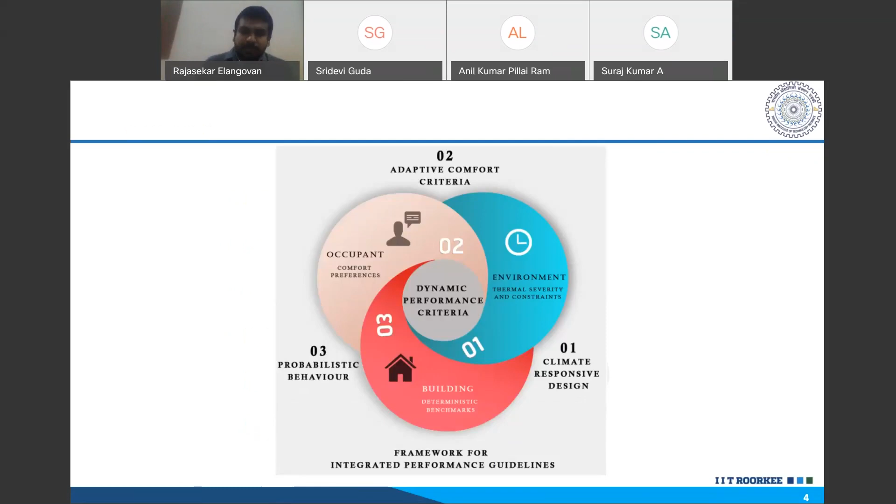So before we move, this is a slide which I take up every time I start a new topic. This is how I see the building and the performance of a building. There are three major aspects which drive the energy use in a building.

Number one, it is the environment, the thermal severity. Say I build something in Hyderabad versus something in Delhi, Roorkee, Chennai, or Bangalore. So it is the thermal environment that is driving some of our primary energy needs in the building. It is also the occupant, so it is me living in Bangalore, me living in Delhi, or me living in Roorkee, making the building use more or less energy. So first is the environment, which is putting some thermal stress on the building.

Second, it is the occupant who is using these gadgets or appliances, eating the energy. And third, the building itself. When I say building itself, it is the brick and mortar, the envelope, the fenestration, glazing, everything put together, what makes the building by itself, just by itself.

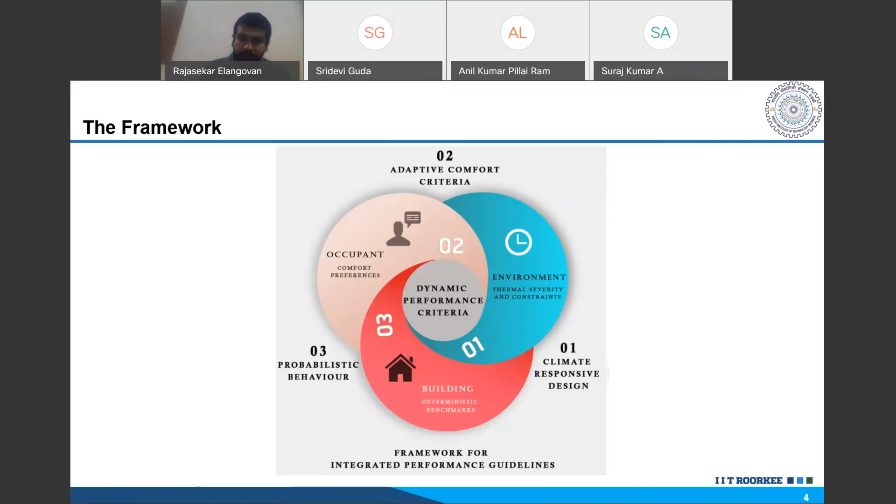So I'll just quickly move on to energy in buildings. Commonly, we refer to energy in buildings as the cooling energy, which is the climate loading we call it.

What is the load which is imposed on the building by outdoor environment? It is a basic thing which HVAC engineers do in cooling load calculation. Plus, there is an internal loading. That is, a building may have 10 people, it may have 100 people, or maybe just one person. Maybe it has 100 computers, maybe it just has one piece of equipment. So this together gives you the cooling energy, which is of course a major energy guzzler in the buildings.

Any building, it could be office, it could be a residential building today, a simple middle income group residence. Cooling energy demand is something which is a major share. Second comes the lighting energy. Apparently, in the last 3 to 4 years, the lighting energy demand has gradually come down for two reasons. Number one, we have started shifting towards more efficient lighting systems.

And number two, the time of usage, duration of usage, plus there are some code standards which have come into picture, which have started driving natural lighting to be better utilized. So probably for these two reasons, the lighting energy demand has slightly percolated down. Then there are plug loads, which is like any gadget that we use. In an office, it could be computers, photocopy machines. At home, it could be your oven, fridge, washing machine, etc.

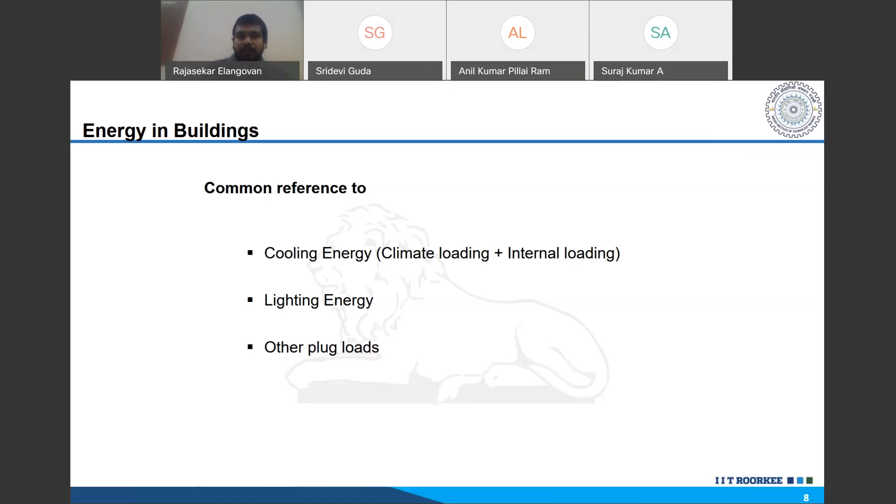If you look at like you have your appliance rating, Bureau of Energy Efficiency also has come up with a schematic. I wouldn't say it is a perfected rating, but still it has come up with a ballpark rating for buildings also. Primarily for residential buildings; of course, there is also a rating, EPA rating for office buildings, commercial buildings, but I would primarily be talking about residential buildings. That is the context I am going to cover more.

If you look at, there is something called EPI, that is Energy Performance Index. That is nothing but how many units of electricity you use per square meter in a year. Based on that, and depending on which location, which climate you are located in, the numbers or the band of numbers might fetch you a single star, 2 star, all the way to 5 star. And it also depends on whether your building is less than 50% air conditioned, like our residences, or more than 50% air conditioned.

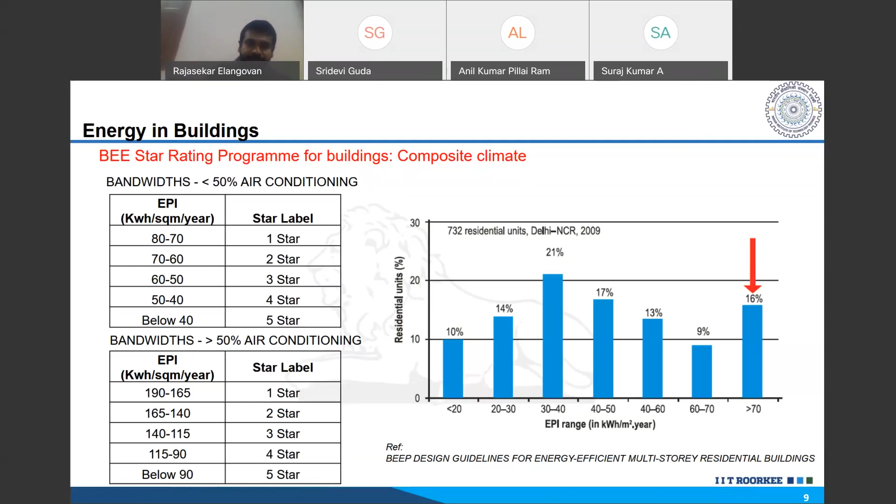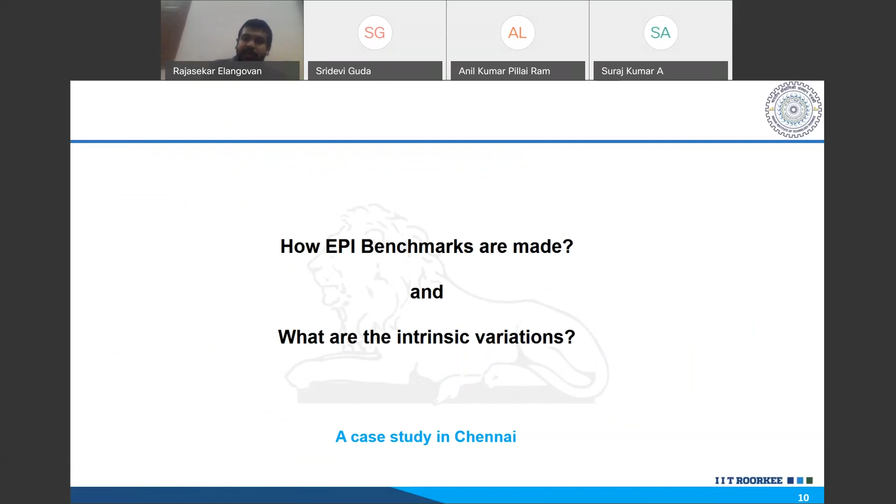Now, before we move on to the material side of it, let us just look at how these EPI benchmarks are made and what are the variations. I will come back to this point, like why I'm talking more about EPI and EPI benchmarks. This is a simple residential tower. It was a case study that we did in Chennai city, somewhere in the outskirts of Chennai. There are about 600 plus houses in this development. It is a small gated community, about 15 storied.

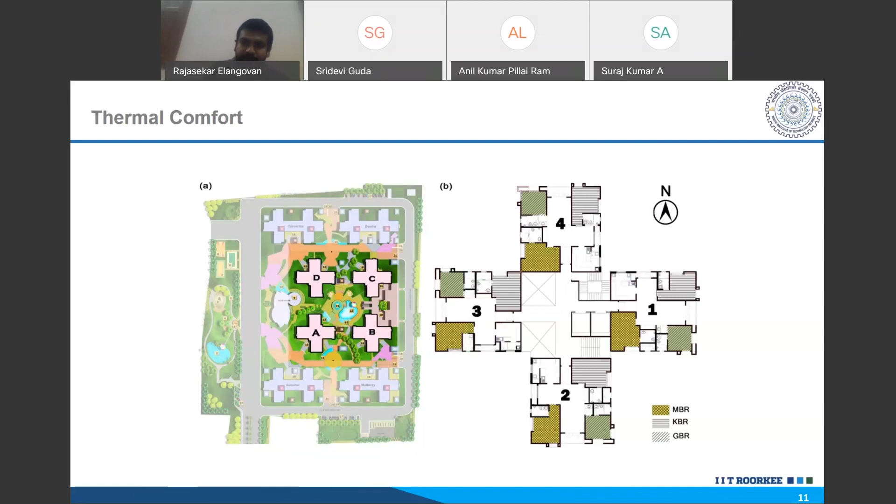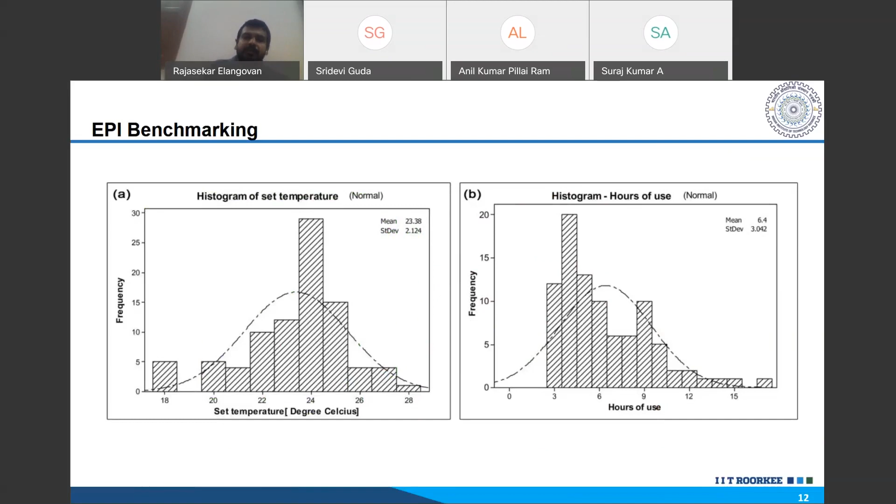There are around 600 middle income and higher middle income units, typically 3 bedroom luxury units. So we did a slightly systematic assessment of their set point temperatures. We studied their hours of usage, their appliances. It is like a pre-energy audit, not a complete energy audit. But then we started looking at systematically what is their electrical energy consumption. We took about 5 years of data, what they have been consuming in the past 5 years.

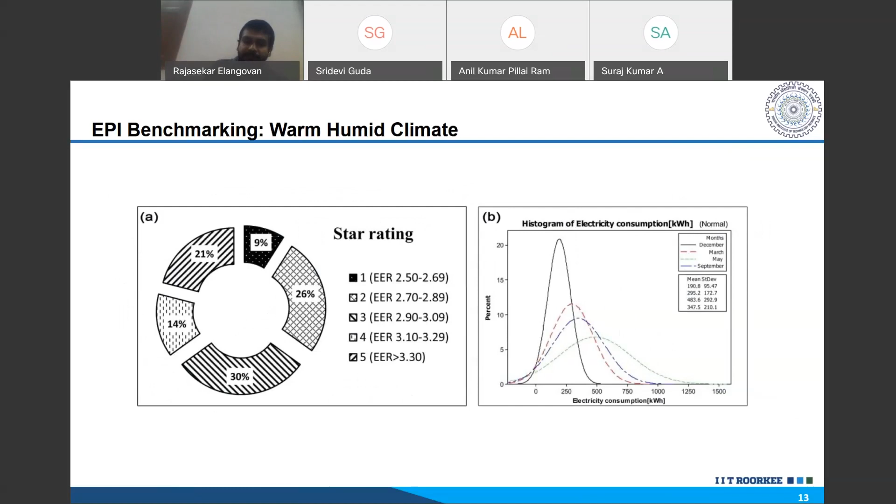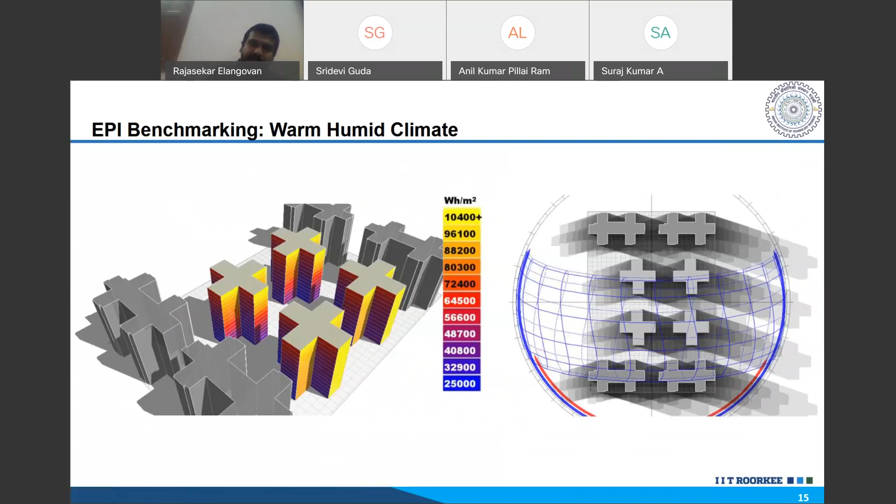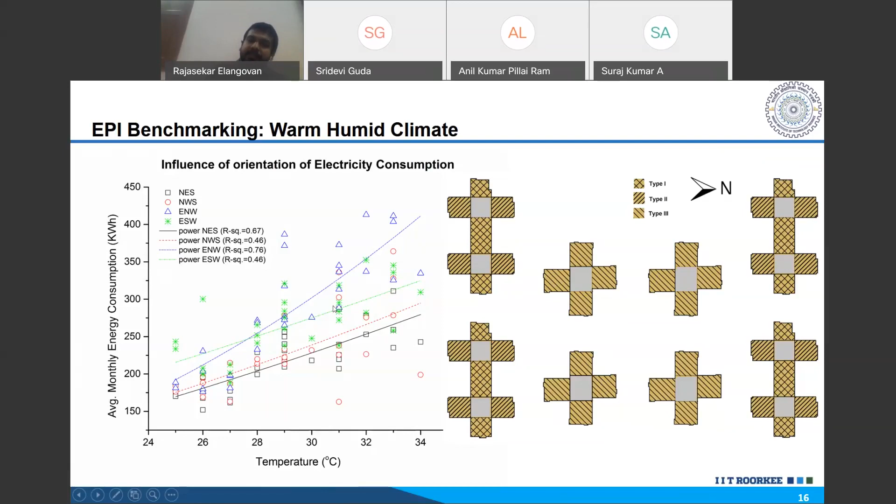It is that simple. But if you look a little more into the details, there is a different solar exposure for each of these buildings. What you are seeing is a small block model. Each orientation has a different type of solar exposure all through the year. I'm not going into the details of it again. When I say NES, it means north, east, and south exposed. This is north, west, and south exposed. Each house is exposed to 3 different orientations. Now, depending on the orientation, there is again a strong influence.

Now I'll stop it here. I will come back to this in about 5 minutes. Let us look at what the total energy in a building is. It is not just the operational energy, that is cooling, lighting, and appliance energy. It is not just the operational energy alone.

We also have embodied energy, that is the energy which is already embedded into the material before you take possession of your building. It is an aggregated energy of what it takes to make a brick, what it takes to make a precast concrete wall, what it takes to cast in situ a shear wall system, what it takes to make an RCC column, everything, starting from your pavements to your handrail, glass, everything. So if you meticulously total everything, you get the total embodied energy.

And this embodied energy is already built in, for which the owner is not liable. It's already there, by virtue of your material specification and your construction technology. This energy is already built into your building system. This is what Mr. Anil was referring to about whether concrete is sustainable, whether it has low or high embodied energy, and how to reduce it. We will just go back to that point very specifically.

Of course, there are different ways of assessing embodied energy. Again, I'm not going into the details of what these methods are. In simple terms, we mostly refer to a method called cradle to grave. Cradle is where the material is born, that is where you excavate and pick the raw materials. And grave is where you bury it, where you dump it. Construction demolition waste, if it is dumped, becomes grave. But if you are trying to recycle it, putting it back into the cycle, then it becomes cradle to cradle.

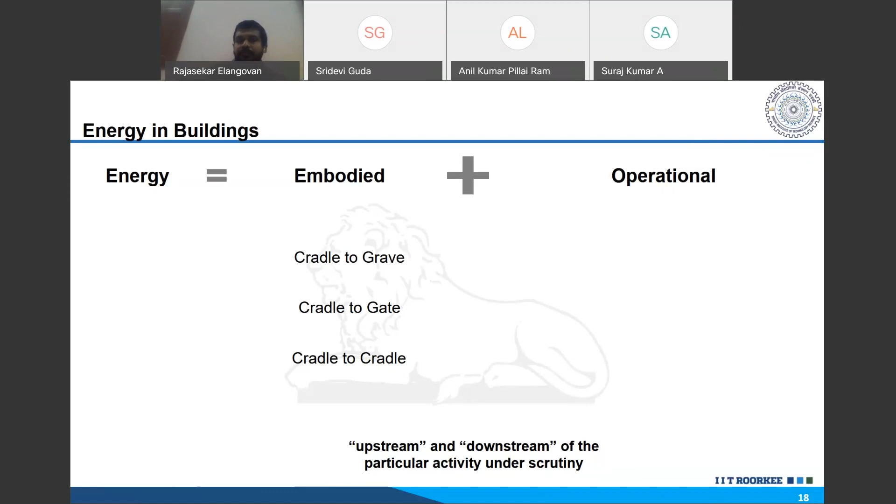But in simpler calculations, we use cradle to gate. That is, it is born at some place and it is reaching me. I am purchasing the material, so it is delivered to my gate. So all that energy in transportation, in making, in excavating, stacking it up, storing, everything put together adds up to cradle to gate. So this is a common approach which you will find in any research or any documents that you go through.

Life cycle assessment is very useful in the sense that it tries to capture the holistic picture of the material's actual energy consumption. Because if I am saying the material is a very good insulator, actually what I mean is when I use that insulating material in my wall system or in my building envelope, I am reducing the operational energy. But maybe the making process of the material itself could have been very exhaustive and it would have eaten up a lot of energy there. So all insulating materials or energy efficient wall systems may not have good or favorable embodied energy. Maybe already there is a lot of embodied energy built in.

The common example, as I always take in any discussion or debate, is that the sustainability of a material by itself doesn't mean anything in today's market. You give the most sustainable material to a multi-storied building and the guy has 3 air conditioners and he runs them every day, then the concept of sustainability is totally gone. Whereas if you actually deliver a moderate material to an energy conscious user, then the overall energy that the material and the building take over their lifespan makes a lot of difference.

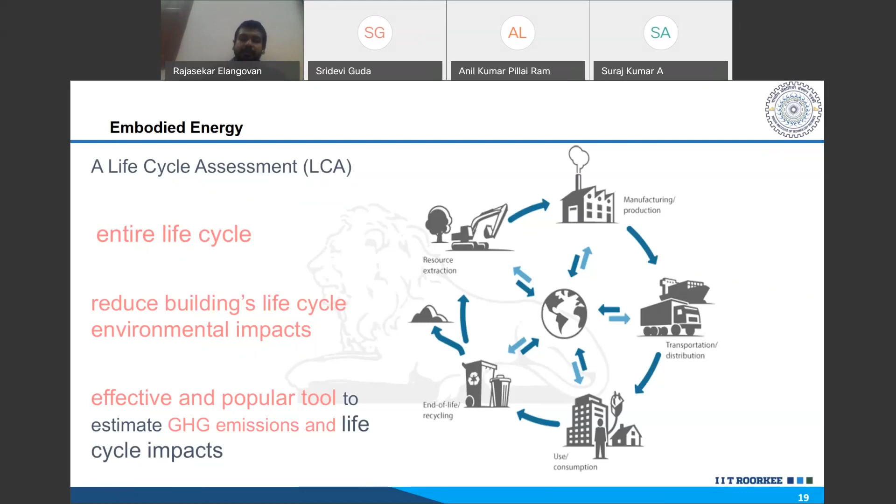Now, there is something very interesting. I am talking about, for example, a brick or a brick and mortar or any masonry system, which is an infill material in an RC frame structure. Frame structure is most common in mid and low rise residential buildings in India. If you look at it, you simply have your RCC beams and columns, and you have some infill material. You can have brick, fly ash brick, aerated concrete, anything, but it is a brick or masonry system with RC frame structure. Now, there is a simple difference. This is what I was talking about when I started the presentation. There is a way in which the embodied energy is segregated in the material.

What happens in the process of brick making? I'm not doing any design, I'm not doing any big research. I'm excavating clay, preparing it, molding it, maybe drying it for a while, then burning it, either in a factory or in a kiln. Then I'm stacking it, transporting it, it comes to the site. But interestingly, when it comes to concrete, concrete structures are taking two major ways of application. Number one, we are using a shear wall system, that is cast in situ concrete, where you have your reinforcements in place and then the concrete is just pumped into the walls, so you get your shear wall system. Number two, another emerging, or I should say already emerged, method is a precast concrete system. You make everything in the factory, you get concrete slabs, even staircases, sometimes smaller rooms like your bathroom units, which are just brought in a truck and assembled. So typically you are assembling or fabricating on the site.

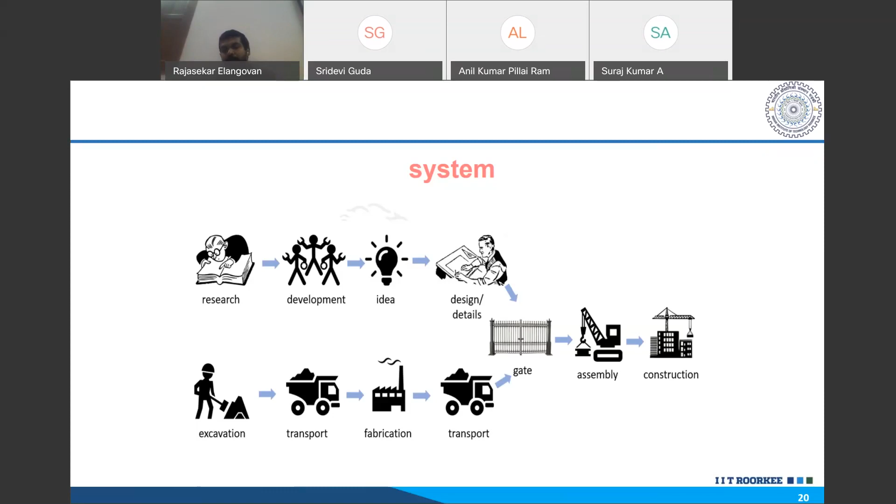There is an engineering component. So somebody or a team is sitting in an industry doing research. So there is some amount of energy consumed there. Then there is a development of that idea. Then design detailing happens. Then there is a fabrication part in the industry that is taking in a share of its energy. Then it is transported and it is assembled. So what we did actually was, we went into mapping the whole energy consumption links, I would say, or sub-processes of new construction system.

Interestingly, we found, or we could establish, that it is not a single directional or a single dimension approach. It should have three approaches. That is, one is the material quantity, number two is the manpower, and three is the time. It should be a three-dimensional assessment which will give the actual picture of the embodied energy or the carbon footprint or the carbon emission associated with these materials.

When I say three dimension, why I am insisting here is most of our embodied energy assessment today is single dimension. If you ask an expert to compute what is the embodied energy, he or she is going to compute the material quantity. Either he will take the bill of quantity or he will compute the quantity estimation, and based on that there is an embodied energy value. For example, if it is brick, it is X. If it is concrete, it is Y. And if it is a fly ash mixed concrete, or some other industry waste or slag based concrete, then there is a Z value.

Now these are aggregated, but what we have established through our field data is there is an offsite process which cannot be ignored. For example, there is a design process, there is a fabrication process. When I say design, there is resource which is material and manpower, fuel as well as infrastructure. When there is a fabrication, there is a process, that is techniques and logistics, plus you have technology, then you have certain specific equipment which could be manufacturing equipment or some equipment which is used for lifting, placing, assembling. Then there is an on-site process. In the on-site process, again it is material, manpower, fuel plus techniques, logistics and equipment.

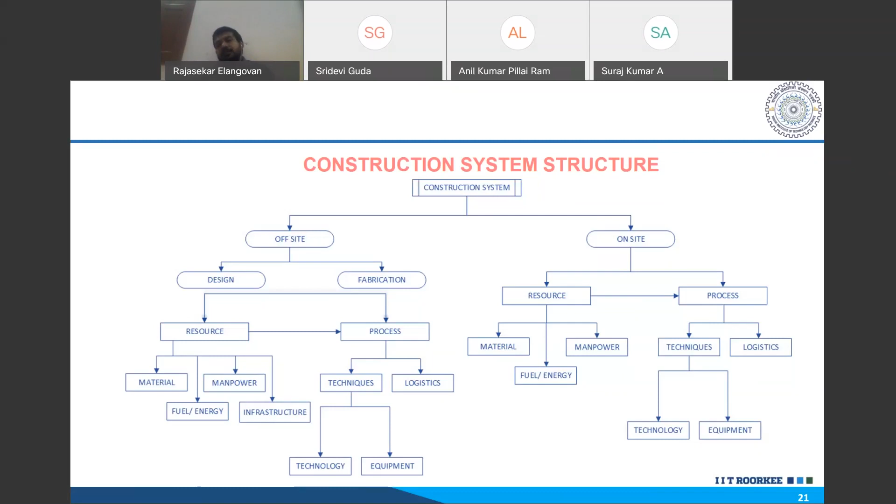So now what is so interesting here is, irrespective of what material I'm going to use in my superstructure, what type of further materials I'm going to use for my paving, for my plastering, finishing, etc., when I'm going for a high-rise building, already the footing or what is under the ground, this building had two basements, two car parks. So if you actually look at below ground, you cannot negotiate with this because there is a live load, there is a dead load, and this much is the type of footing for the soil which is to be designed. It is to be done.

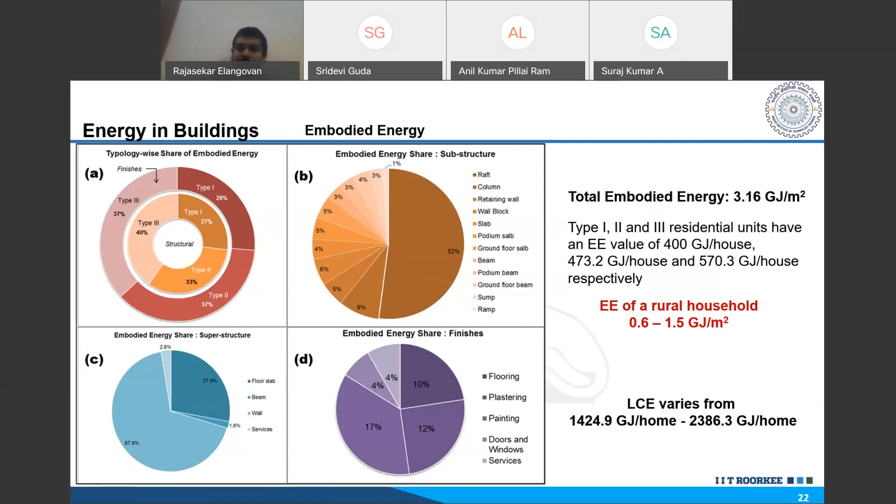Let me see the feedback. Is there some issue with the audio or something? No, it's okay, we are able to hear you. Okay, we can hear you loud and clear. Please go ahead, sir. Yeah, thank you. Oh my goodness, I'm so sorry, I pressed the wrong share button. The screen has gone, no? I was trying to - okay, now it's coming. I'm sorry for that. No, it's okay.

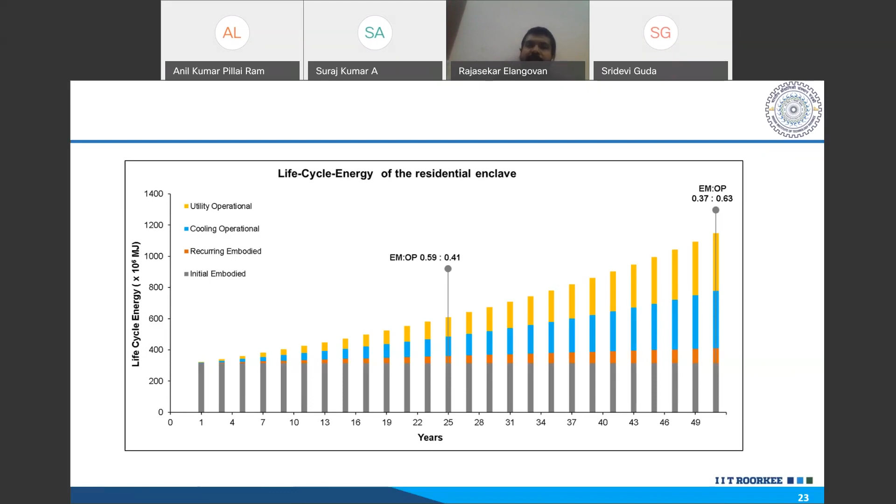I'll show you a small case study that we did using a spatial tool, where we combined a geospatial system plus building information modeling, and we tried to map the life cycle energy of buildings. We took our own campus.

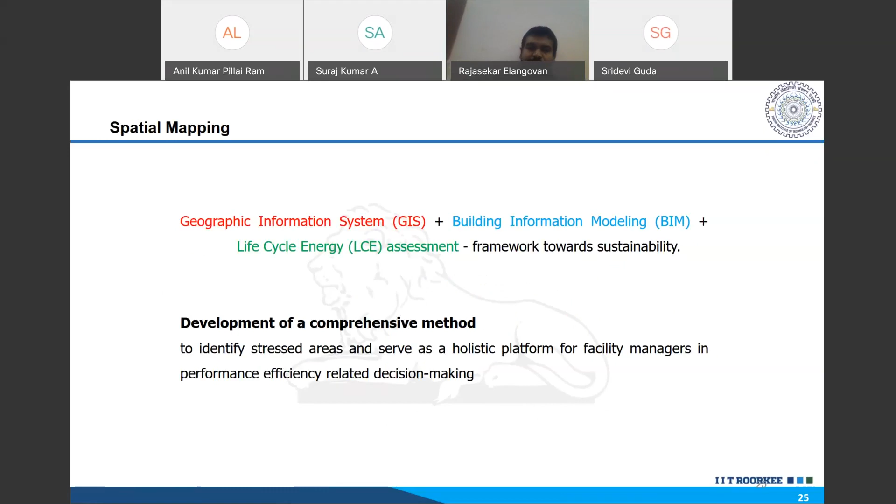This is IIT Roorkee campus. We took a part of the campus to ensure we had variety of buildings coming in, around 40 acres where we had apartments, institutional buildings, a hospital block, hostels, departments, and a guest house. So we took a stretch of around 40 acres with variety of buildings because of their spatial type, material used, and operational character.

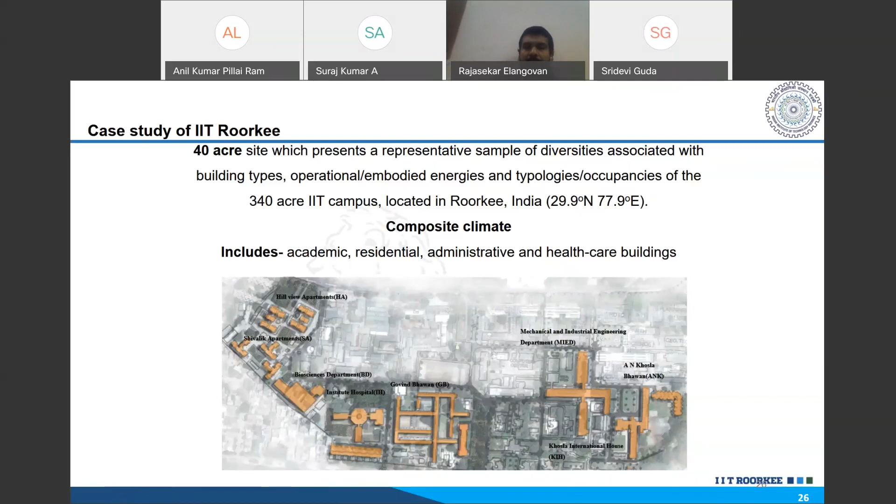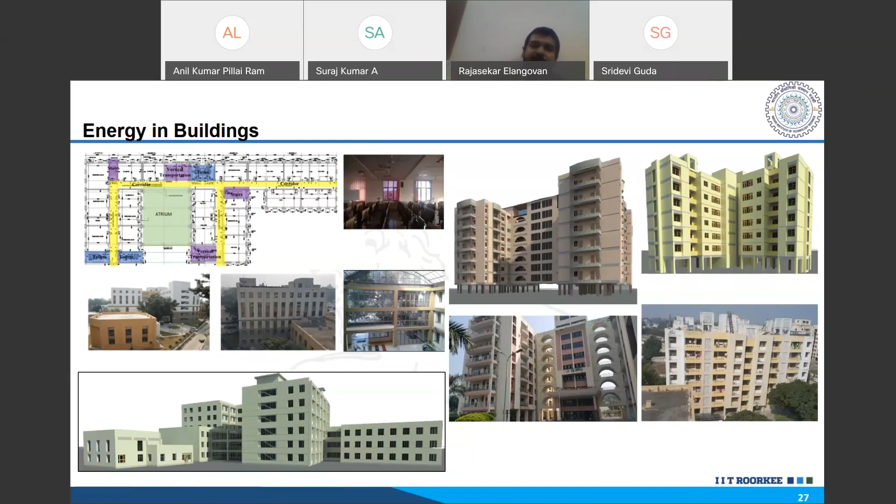These are the buildings for your view. We made a building information model. Some buildings are very old - around 45 to 50 years old. There are buildings which are 2 to 3 years old, some new academic blocks, a new hostel building. There are some mid-age buildings which are 10 to 12 years old.

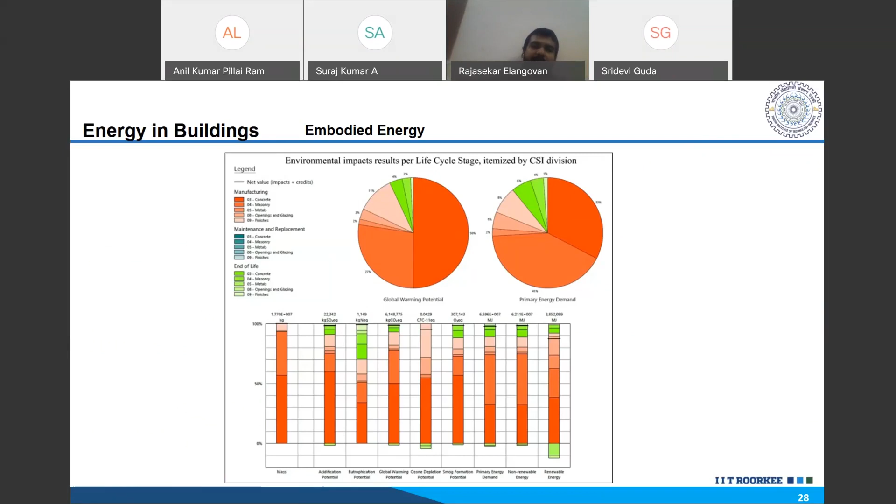So first we did a building information model where we took the material quantities, we took the estimates. Then by default procedure, we computed the embodied energy of this material, this building. Then we took their monthly energy bills like we did in the previous case.

So in summers we have the cooling equipment taking the energy, in winter we have heating equipment taking the energy. What I wish to point out here - the same building, same plan form, same spatial configuration, same material - if I am building in Chennai or Hyderabad versus making the same building in a midland area like Delhi or Roorkee, the energy consumption, especially the operational energy consumption, is going to be much higher. So the overall sustainability dimension is also location dependent.

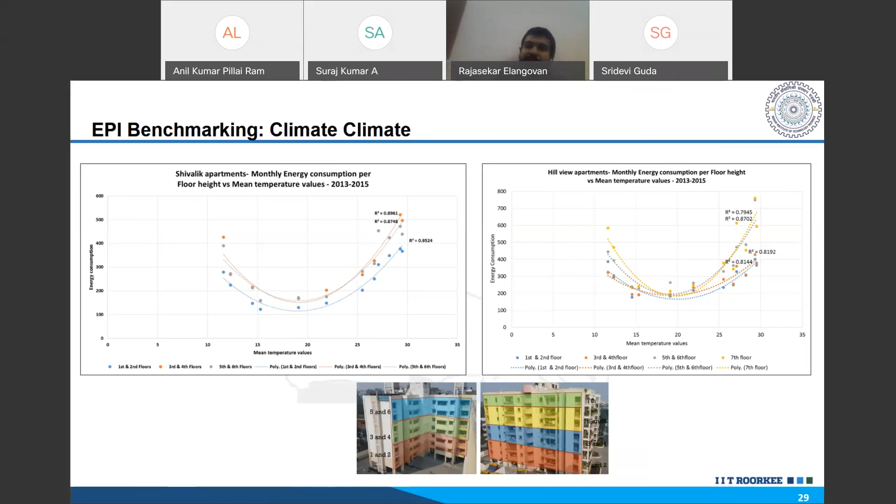Now quickly moving on, like I explained earlier, we did compute the embodied energy, we took the operational energy, then we computed a 50-year lifespan life cycle energy of buildings, and we converted it to tons of CO2 equivalent carbon dioxide, that is CO2 carbon footprint equivalent. Equivalent means we can add up the small other components from other gases, taken as equivalent of CO2. So here we are expressing it as carbon footprint, in tons of CO2 equivalent.

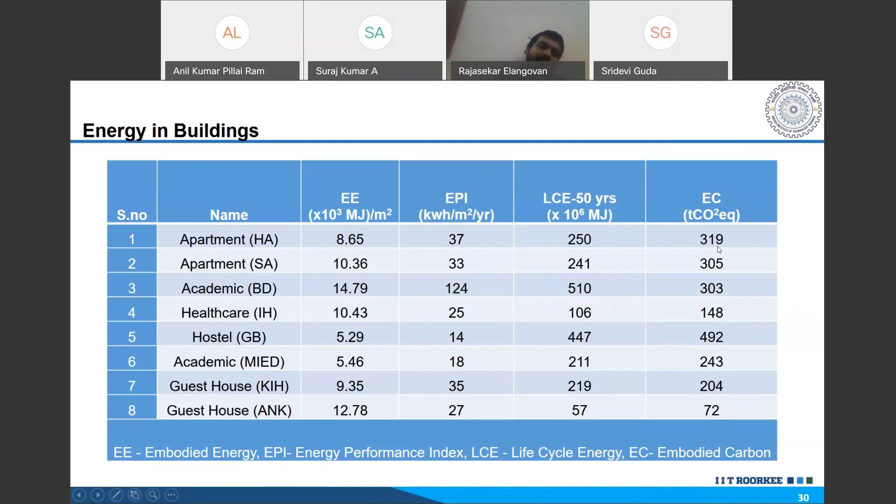So starting from apartments to healthcare buildings, the CO2 emissions - for example, there is a guest house which is consuming pretty less because some of the rooms are air conditioned, some are not, or predominantly it is not air conditioned, versus we have some academic blocks plus a hostel building which are consuming a pretty high amount of energy. There is an embodied and operational share, I will go into the details. But actually what we started looking at is...

What has been the development of this building, because the campus didn't come through in a single day. Ours is a campus which was started in the British era. It has lived for around close to 180 years now. It started as a small, single building in that 340 acres, versus we have almost occupied the whole 340 acres now in 2020. So what we did was we went around 40 to 50 years back.

That means we started removing building by building, and then we started checking how much was the carbon emission 10 years back, how much was the carbon emission 20 years back, how much was it 50 years back.

Plus we did a small but very interesting thing here. If you see the topmost layer of these slices that I have placed, it reads carbon sequestration of landscape elements. This was a very meticulous exercise that my student did. He went around this 340 acres of land, counted tree by tree, noted the species, counted the life of the tree, and calculated what is the age of the tree.

Depending on the age and species, we can compute how much carbon a tree can sequestrate, that is, how much carbon it can eat during a particular time. We call it carbon sequestration potential. Some of our native species have better carbon sequestration potential. Classic examples are banyan tree, neem tree. These have better carbon sequestration potential versus some of the smaller, quick, fast growing trees that we plant today, which do not eat that much carbon.

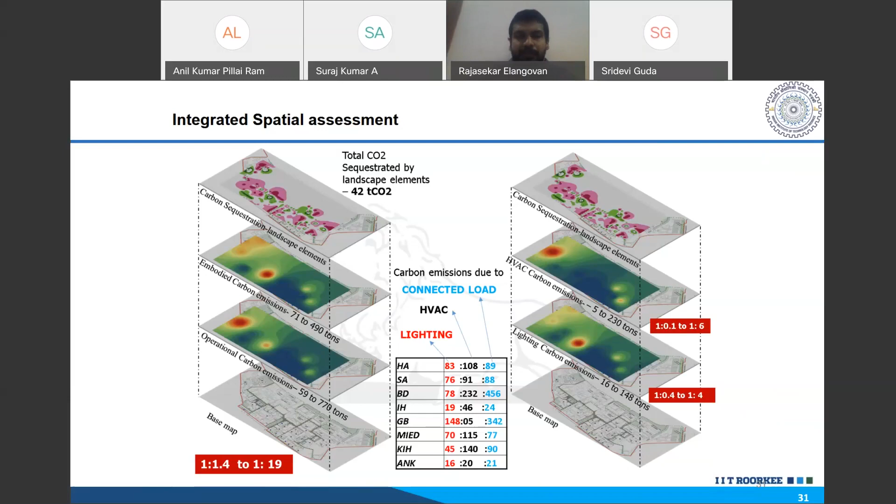Last but not least, I will go into this for about 5 minutes. This is becoming very essential because we are missing some critical links in the way we look at the performance criteria for our building envelope. If you look at some of our older settlements and houses, these buildings had nice roof forms, massive walls, maybe 2 foot or 3 foot thick wall systems, and they have been very comfortable and convenient without air conditioning.

Of course, with today's demand supply gap, we cannot go back to building such luxurious villas for ourselves. It is the compulsion of the day, the technology, the time, the demand which is forcing us into innovation and new methods. But how do we get back to the comfort in which we were living? Maybe not the same building material, but a new material with similar type of performance.

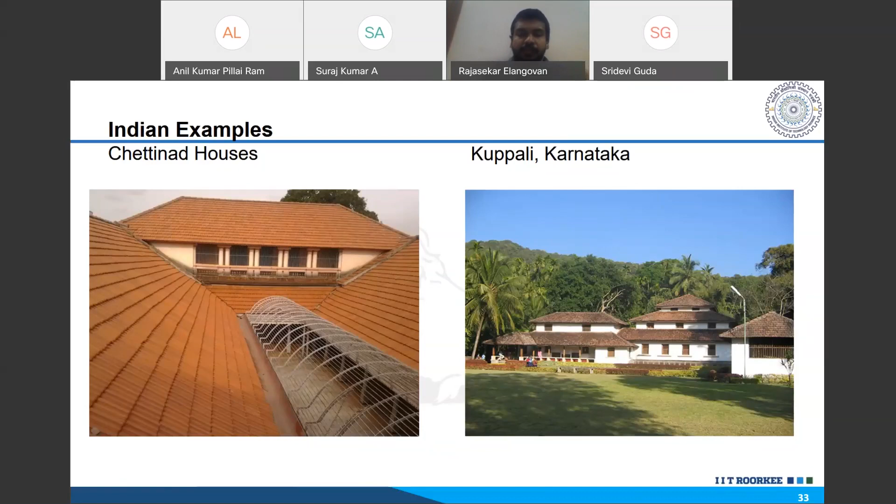Now, the most commonly used indicator for material performance is the U value, that is thermal transmittance, which indicates how much heat is conducted through a wall or material when there is a unit temperature difference per square meter.

So it is the amount of heat transferred from one side to the other side through conduction. But actually we are missing out on some of our existing or typically being used performance criteria. U value, for example, is an indicator of resistive insulation.

And this is the single most dominantly used indicator in most of the European countries and the US. They will be talking about something called R value, that is resistance value. We are talking about conductance and transmittance value, which is the conductive heat gain. So we are talking about how much the material can resist the heat. It's a resistive insulation. So the lower the U value, the higher the resistive potential.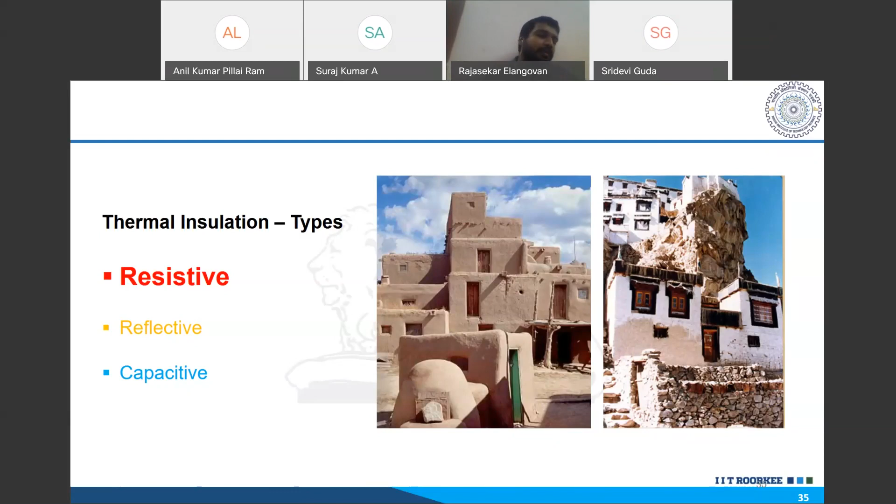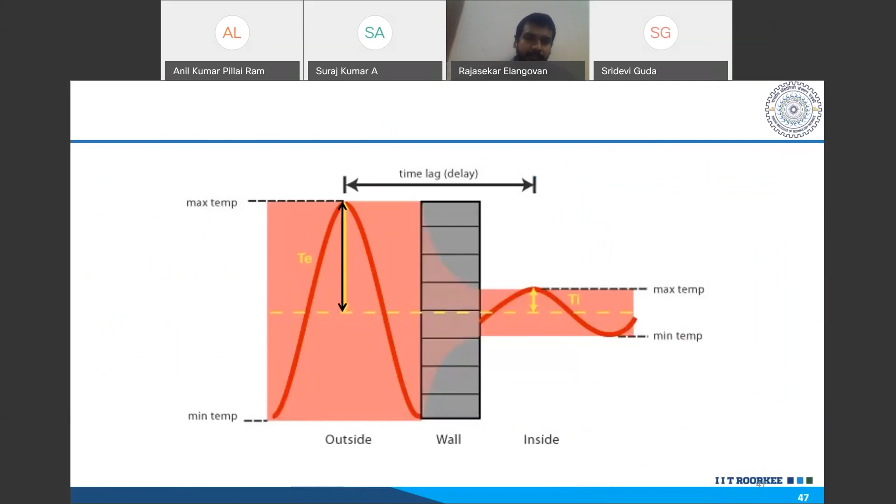I'm skipping some of them. I'm just jumping into the later part of it.

Yeah. With our own experience, with some of the consulting as well as this industry support that we have been extending, we have been successful in creating a 150 structurally insulated precast concrete system. This concrete system has like 10 to 12 insulation, which is sandwiched between the two layers of reinforcement which is present.

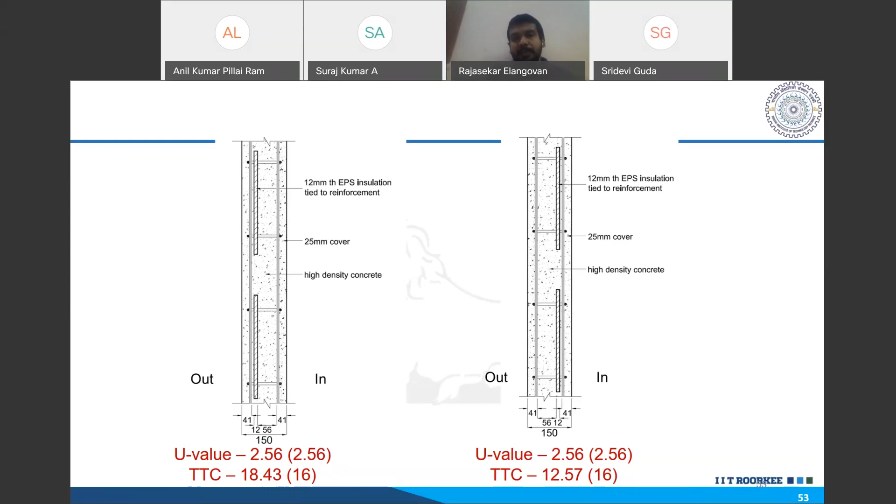Now this is actually giving you a nearly equivalent performance of a brick wall, that is, it is meeting the U value, plus more than that, it is also meeting the thermal capacity requirement, which we express in terms of thermal time constant. It is more or less equaling the thermal time constant which is prescribed in our building codes, at least the National Building Code. National Building Code has, apart from U value, thermal time constant, thermal damping, thermal performance index. These are some of the criteria which are set forth in our National Building Code.

So with 140, 150 concrete slab, I'm glad to share that we have gone in for fire rating, fire testing for this; 3.5 hours of fire rating has been tested for this material. Durability has been tested, spalling potential has been tested, constructability has been tested. We have done it in full scale. There are a couple of buildings, residential towers in Delhi, where we have employed this specific technology, and it is standing its time, for now about 5-6 years it has performed.

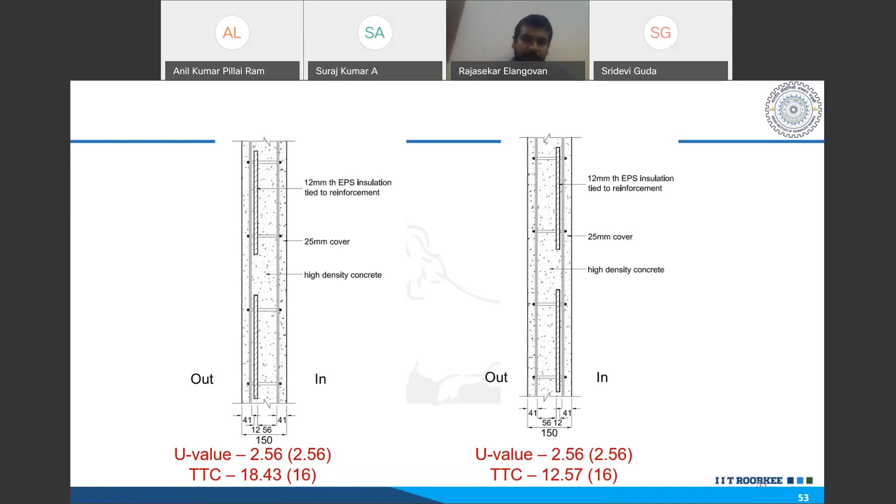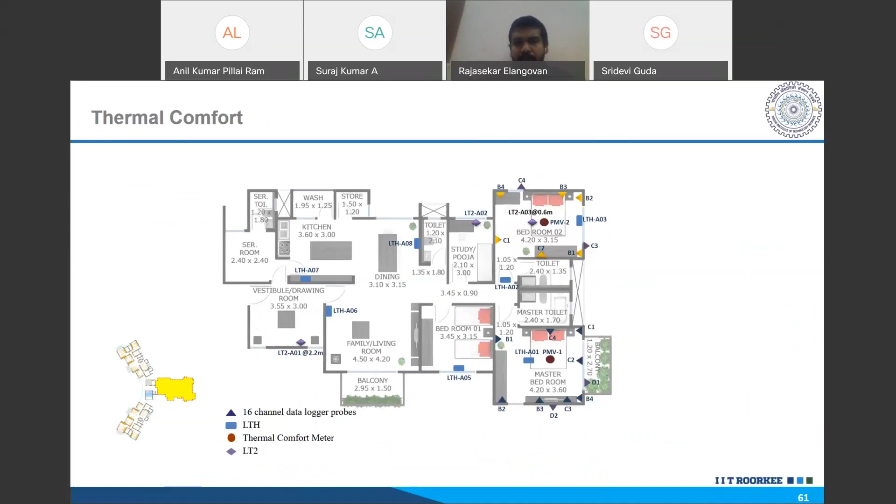So with this I would like to stop. Maybe I can take some questions. I wouldn't want to go much into the lecturing mode. Thank you. Any questions?

Yeah, questions are there. It was a nice presentation, Dr. Rajasekar. In fact, you have touched upon the holistic aspect of how we need to go into evaluating material. It is not only the embodied energy, but operational energy, life cycle of building. Very interesting. A few of the questions by Dr. G. Venkateshwarlu. What is the design criteria of green building in different climatic conditions in various seismic zones when we compare Hyderabad and Delhi?

To be honest, I am not aware of the seismic codes because I have never worked on the seismic aspect of the building. But I can just tell you about the energy performance requirements, which are different. Unfortunately, I have to agree, both Hyderabad and Delhi fall under the same climate zone. Again, that is another revision that we are working on currently along with the US partner and CBRI. It is a project, we are almost ready to launch a revision for our climate data handbook, in which we are recategorizing the climate zones.

But if you go with the current climate zone, both are defined as composite climate zone. So the energy performance requirement or the EPI requirement are similar, which is actually not correct. Hyderabad is not as severe as Delhi in summers and winters, especially in winters. It's mild winter and slightly milder summer, I would say, compared to Delhi. You don't get that much of heat wave phenomena.